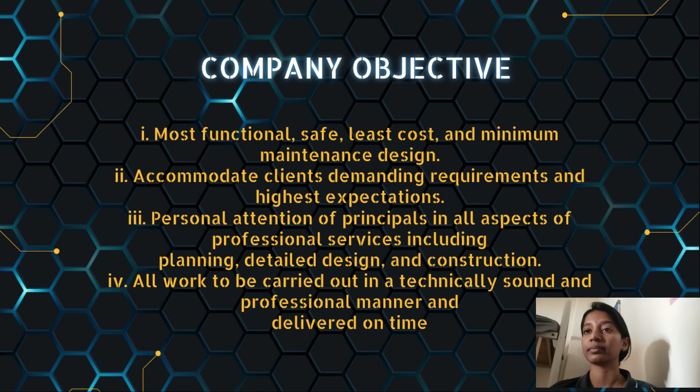Organizational chart: the managing director is Nurrul Riffqah binti Muhammad Suffian. The project manager is Nur Ain Nasywa binti Aminudin. The vice project manager is Nur Adlina binti Badrul Hishsan.

The civil and structural engineer is Nur Ain Syafikah Hamira binti Hamdan, and the geotechnical engineer is Sahsi Kala Gothandam.

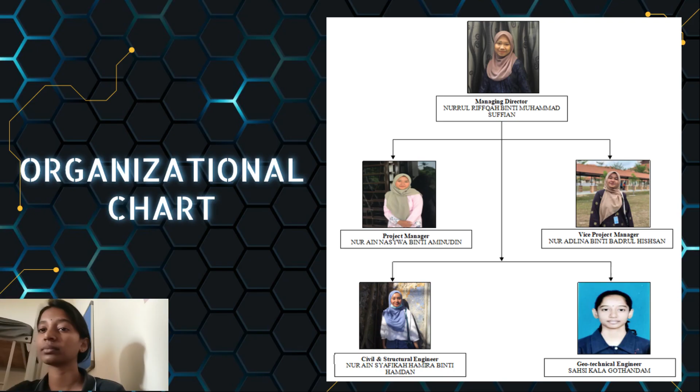Assalamualaikum, my name is Nur Ain Nasywa binti Aminudin and I will talk about the soil profile and field exploration of this project, which used multi-speed rotary wash boring, standard penetration test, and undisturbed soil sampling.

Borehole 1 was taken as the reference based on the soil investigation, and the result for borehole 1 is as follows: the type of soil is silt, and the borehole depth is 24.405. The figure represents the soil profile for borehole 1.

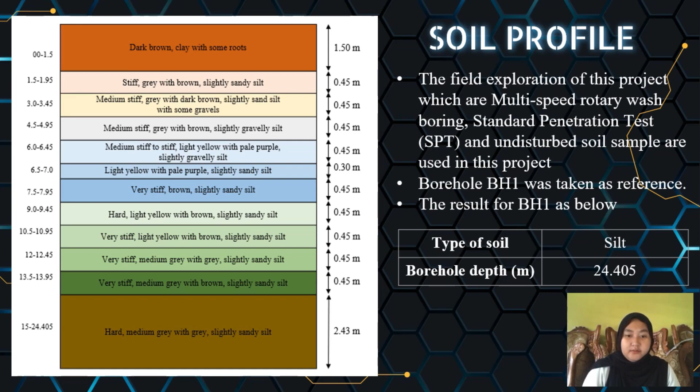A shallow foundation has been chosen in designing the foundation of our project. Based on the soil profile, the second layer of soil is chosen because the depth of the foundation passes through this layer. The properties of the soil are stiff, grey with brown, slightly sandy silt.

The depth from the ground level is 1.5 to 1.95. N value is 10, and N60 is 9.9. Unit weight and effective unit weight for the soil are 15 and 19. The friction angle is 30, and lastly the effective cohesion is 9.

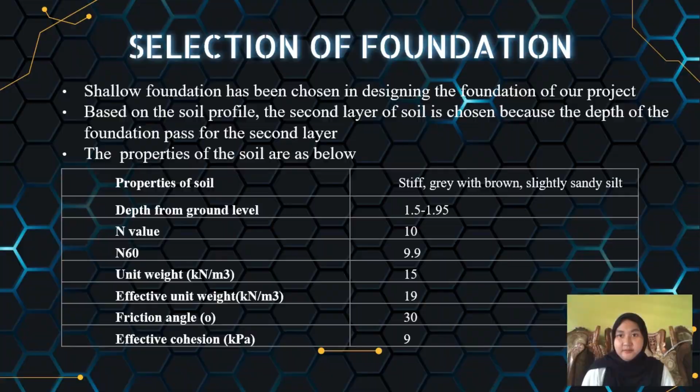Hi, my name is Nur Adlina. For the foundation design, our group agreed to choose P2, P6 and P14 as examples for calculation.

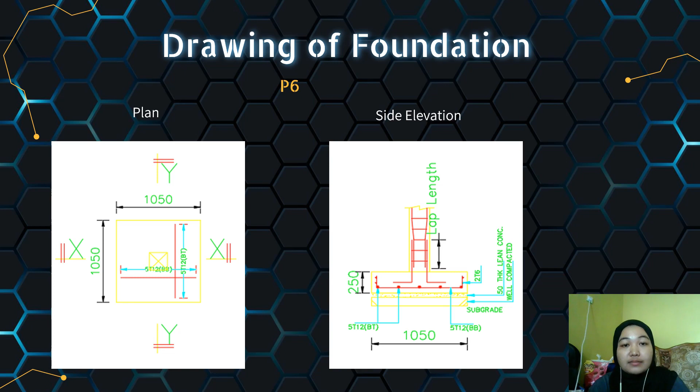This shows the drawing of foundation details for plan and side elevation view for P2. This is the drawing of plan and side elevation of foundation P6. And the last foundation we chose is P14, shown here in plan and side elevation view.

Hi, my name is Nurrul Riffqah binti Muhammad Suffian. Today I will explain an example of the foundation design. I will choose foundation P2.

The details provided from Esteem: the load is 55.1 kilonewtons. The proposed dimension is 750 mm x 750 mm x 250 mm. The value of FCK is equal to 30 Newton per millimeter squared.

FYK is equal to 460 Newton per millimeter squared, and the concrete unit weight value is equal to 24 kilonewton per meter cube. Soil bearing capacity is 100 kilonewton per meter cube, diameter of bar is 12 mm, and the column size is 300 mm x 300 mm.

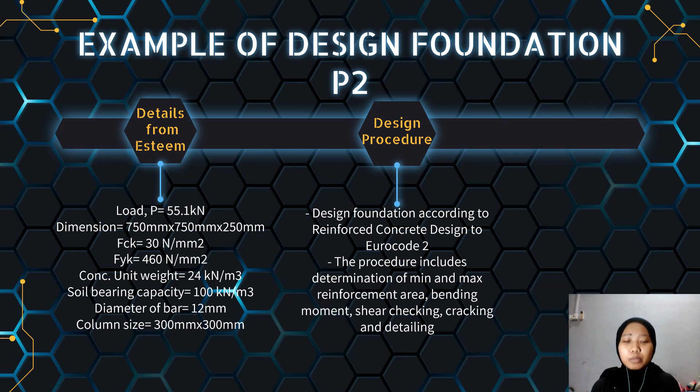For the design procedure, the foundation is designed according to reinforced concrete design to Eurocode 2. The procedure includes determination of minimum and maximum reinforced area, bending moment, shear checking, cracking checking, and detailing.

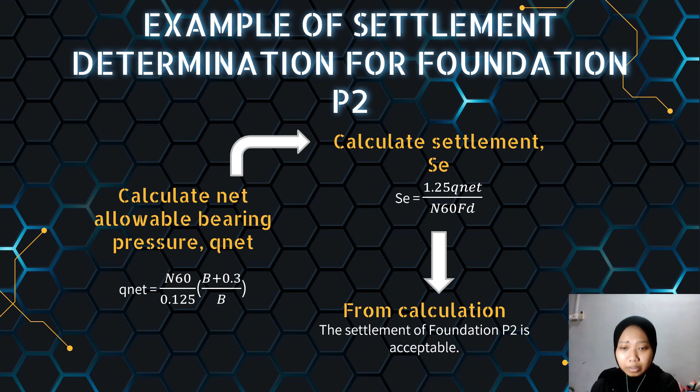Next, I will explain the example of settlement determination for foundation P2. For the first step, we need to calculate the net allowable bearing pressure, which is Q net. Next, we have to calculate the settlement using the Q net calculated just now. From the calculation, we observe that the settlement of foundation P2 is acceptable.

Hi and Assalamualaikum, my name is Nur Ain Syafikah Hamira binti Hamdan. Today I would like to present chapter 5 of our project, which is the discussion.

Firstly, selection of foundation is influenced by three factors: type of soil, type of loading pattern, and lastly economic feasibility.

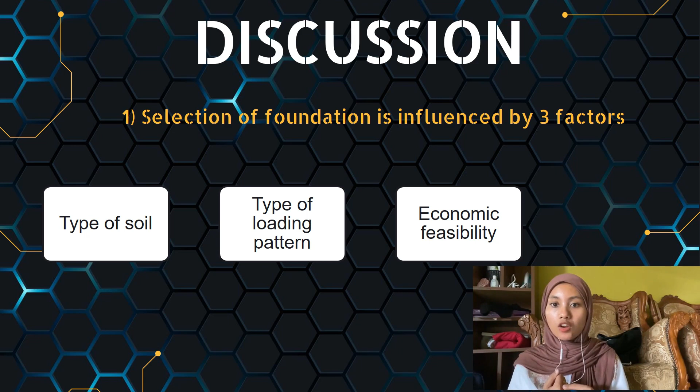Secondly, we have stated the reasons why we use shallow foundation compared to deep foundation. Firstly, from our soil analysis, borehole 1 consists of silty soil. Secondly, the load that we have is suitable for shallow foundation. Thirdly, it is due to economic feasibility.

Fourthly, the depth of the proposed foundation is suitable for shallow foundation, and lastly, we can lessen the soil settlement caused by the foundation.

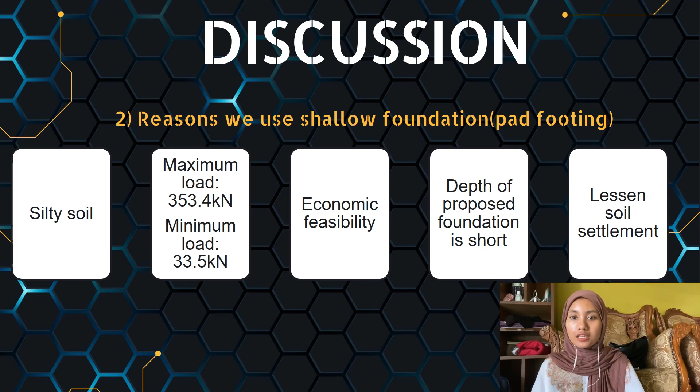The third point in our discussion is the checking used to verify the suitability of the proposed foundation size. Firstly, we check the cracking using the Eurocode. Secondly, we check the bearing capacity using the Terzaghi method, and lastly, we check the settlement.

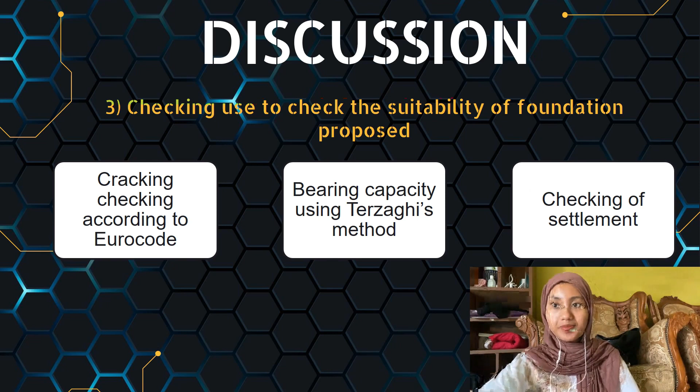The last part of our discussion is the results from our calculation. Firstly, all foundations pass the cracking checking. Secondly, all foundations pass the allowable bearing capacity. And lastly, all foundations have settlement less than 25 mm.